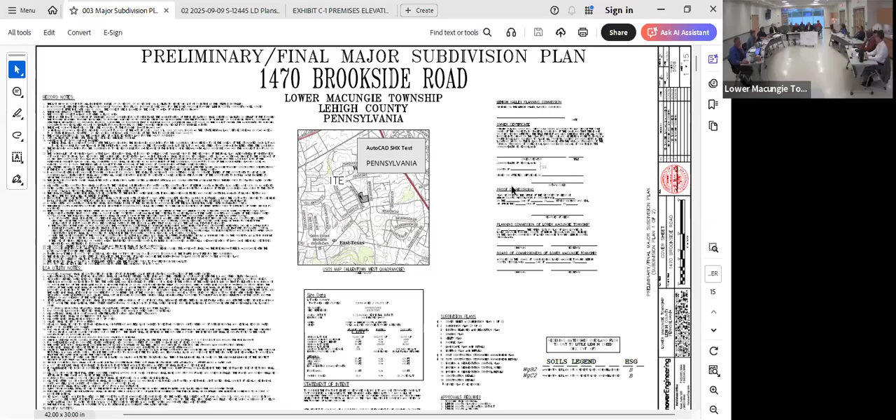Good evening. Sorry, no, all good. So we were turning it over to Brian. I apologize for not bringing you up earlier. No, that's fine. We have the engineer and the applicant and his engineer here tonight.

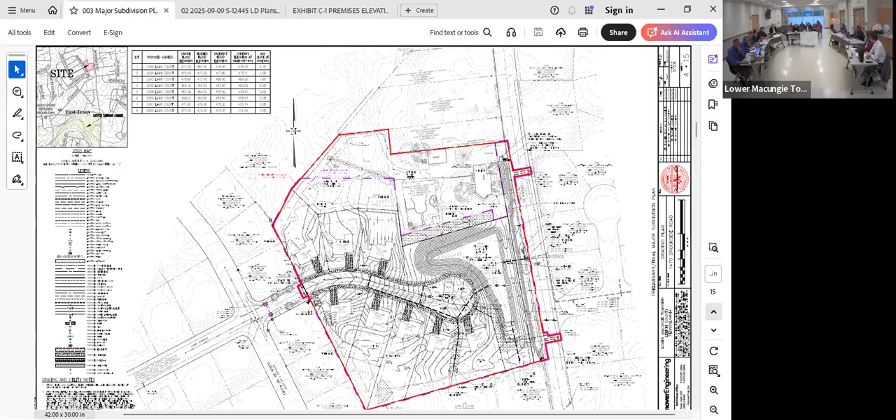We have a review from October 10th. We've done several reviews of the project. At this point, the remaining items are primarily cleanup items. We really don't have any issue with the planning aspects beyond what Nate has already mentioned. I have spoken with the engineer and the items that remain in our letter are basically all will comply. There are some waivers being requested. For the most part, they are what I keep calling the usual suspects, nothing really outrageous.

Based on discussions amongst staff, one of the waivers that will need to be added to the list is something we've been working on with all the applicants of late, and that is the location of street trees. The current ordinance requires them to be in the grass strip between the curb and sidewalk. As most townships have found, over time trees grow, root systems grow, and if the tree matures the way everybody wants, you wind up with roots busting up curb and sidewalk. We've been recommending and requesting that street trees be pushed to the other side of the sidewalk, and everybody has complied. Problem is, it's still an ordinance requirement to be between curb and sidewalk, so we would request that the applicant and their engineer put in an updated waiver request letter to include this. Other than that, it's just honestly a formality.

The other items are requests for preliminary final, the request to show all features within 200 feet of the property. As is always the case, we have a statement that says we can support that, as long as if anything else is needed, we will get it. Most people comply with that, so it's generally not an issue.

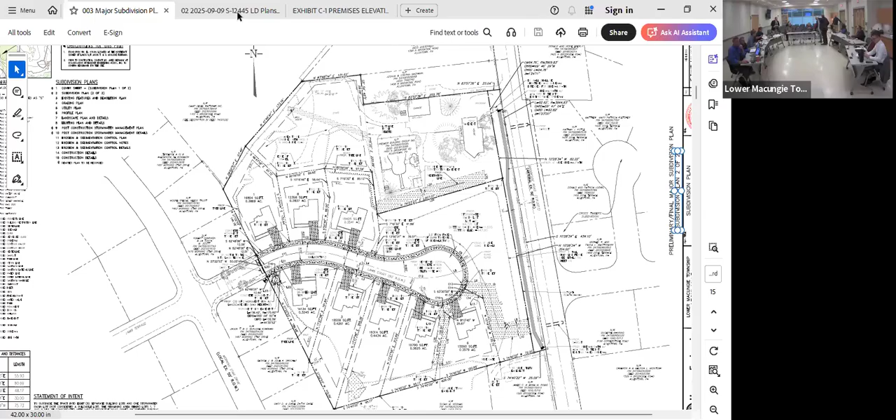All right, so the second item on the agenda is the 2550 Route 100 Sprouts Market and Commercial Development. The applicant would like to come up, if you want to give an overview of this project. Happy to, thank you.

Planning commissioners, members of the public, as I'm sure everyone's aware, this is another project that has appeared before the Planning Commission previously, both as a land development submission and a sketch plan, and has garnered public interest. What you see here is one of the last residual lots of the Spring Creek properties owned by Jaindl Land Company on Route 100. The lot is at the terminus of the new Sauerkraut Lane extension, currently under construction, and would be home to the region's first Sprouts grocery.

In addition to Sprouts serving as an anchor for the site, there is the pre-existing St. Luke's MOB at the south end of the site. In the middle, the new land development submission contemplates a bank and a retail/commercial structure. The overall site is designed with roads and paths to be interconnected and basically act as one.

We have been working in a similar fashion with the applicants from the last project, speaking with the design team to go over review letters discussing items such as architecture, landscape architecture, site layout, stormwater, traffic, and the like. There were a number of public comments given regarding this project at the last Planning Commission meeting when it appeared, and we've taken those into account and had discussions with the applicants internally to make sure public concerns are addressed.

I'd like to note, from a planning perspective, because we know this was a big point with many of our planning commissioners, we have worked with the applicants to increase pedestrian connectivity to two points on the lot coming in off of Route 100 and throughout the entirety of the site.

We've also been able to work with the applicant to ensure that the streetscaping along the St. Luke's portion of the site extends all the way up and around. So this site is going to have streetscaping throughout its whole route, in addition to street trees sensitive to the overhead power lines, on-site planting, as well as shielding for deliveries and garbage.

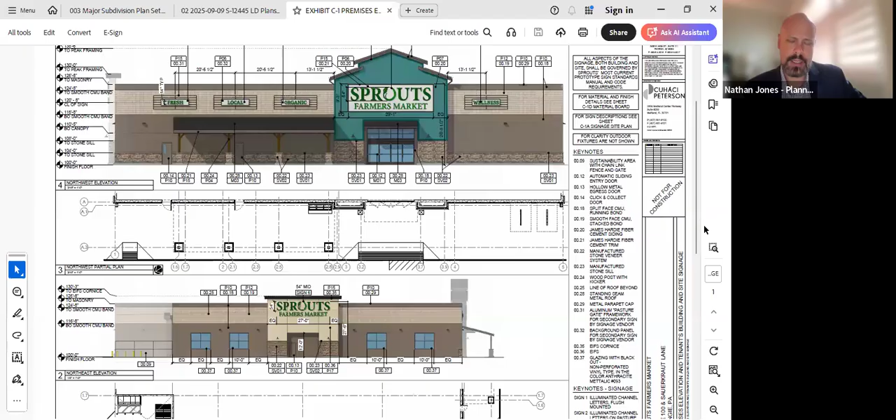On the north end of the site, we also worked with the applicant and their landscape architects to address the stormwater treatment on the opposite side near the existing residences on Quarry, as well as visible from Route 100. We are now working with a potential site design that, from a landscape architecture standpoint and plantings, meets our Brandywine Swale / Firehouse project that we as a township did, which we point to as what we really look for in terms of naturalization and aesthetics for our stormwater structures moving forward.

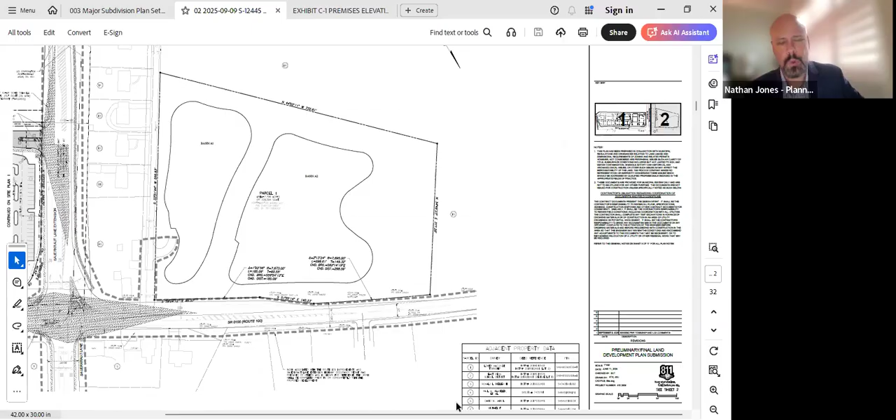There's a number of flowering trees and specimen trees located there, along with seed mixes that include plenty of meadow plantings that'll provide interest from spring all the way to fall. We're very happy that we were able to work with the design team to get such a great product that'll be visible from such a busy street—another large landscape stormwater treatment facility that meets our township's goals.

We've also spoken with the applicants about the fact that this is a very important pedestrian and biking area for the township as we continue to try and weave together our greenway and trail network. To the north is Creamery Park, to the west is Quarry Park. We also have our future greenway that runs along the creek, not too far up the road, and of course all of our residential neighborhoods that immediately abut this area off of Sauerkraut Lane. We're very excited that this area can basically act as a nexus for all these trails, hopefully moving forward.

We have noted and spoken with the applicants about the possibility of putting in frontage improvements that consist of paved trails, since this is land development activity, both on Quarry and on Route 100. I believe they want to speak with the Planning Commission about that a little further moving into their presentation. Given the location here and the Sauerkraut Lane intersection, which will also include pedestrian improvements, we are very excited that this area can work to connect so many of the trails and parks that we have in this area of the township, and eventually our greenway along the creek.

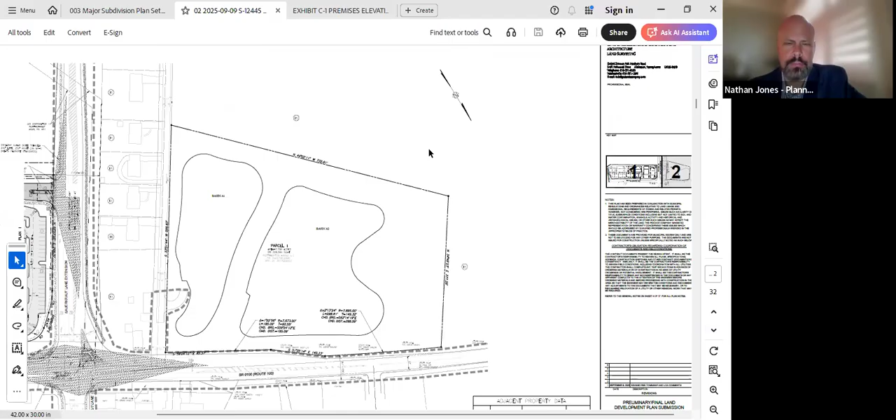So this is all township property here, right? As of a couple months ago. Is there a walkway on the other side of the line? Here, no.

So the idea, Ryan, one of the ideas that prompted this additional request is obviously Quarry Park. Township Park is literally right down Sauerkraut Lane Extension. So there's a need, it's just a matter of trying to build this in as projects are proposed.

Yeah, I mean, I definitely want to see the interconnecting this, but I understand the safety concerns. Does the township have any plans the next 5 years, 10 years to provide that walkway on the Muse properties? I mean, nothing on paper right now, right.

But yeah, so connectivity, like Brian had said, is a goal of the township. Now that the township has acquired that property, we do want to make a connection with Quarry. I'm not 100% sure how and where at this point, but we're looking for other property owners to have that connectivity for us and connect to the lines.

And I would add that the township already has a whole lot of other things in the mix. And I think with the relatively recent acquisition of Muse, that will be factored into future projects. And it's just kind of, with any planning for future parks, et cetera, in my experience it's hard for townships because you could get 10 different people and have 10 different opinions of what should go on that public property.

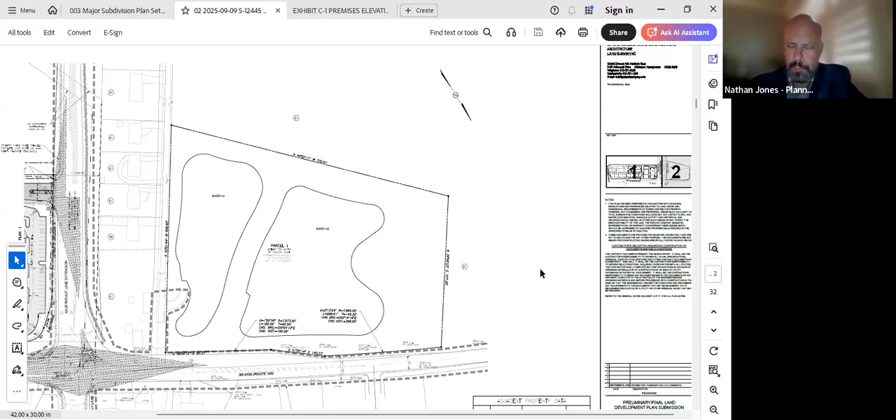I recognize this is different than the normal process. Yeah, I can take that, Mr. Barrett. So essentially, the footprint that you see and the uses as proposed are what would be considered and approved for recommendation by the Planning Commission and eventually by the Board of Commissioners, and then recorded.

If the footprints of those structures change, if the use significantly changes, if the layout of the site and where those buildings are located changes, that would be an amendment to the approved plan, which would require it to be re-recorded, meaning it would come back to the Planning Commission and the Board of Commissioners. If the footprint and layout stays exactly as it is now, with that square footage and building placement unchanged, that wouldn't be the case.

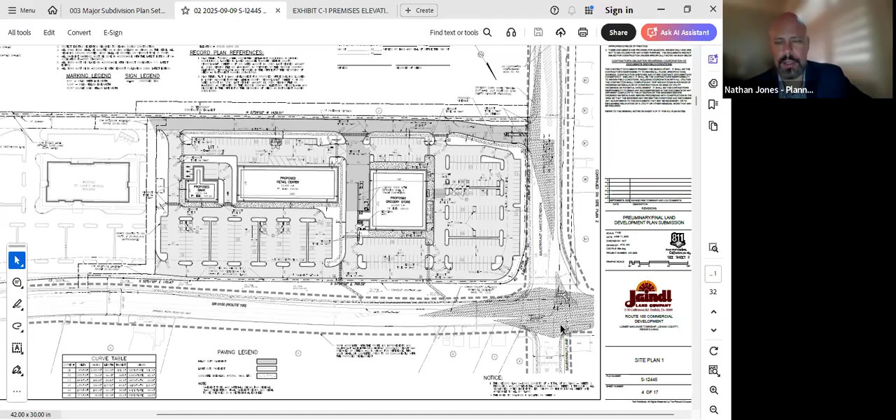But should the market change and they find a tenant with different needs, there's the possibility it could come back in front of this board. Okay, that's fully acknowledged. Any kind of change will come back. I'm not going to try to... no, I recognize that, but again, this is a unique project for a number of reasons.

Okay, so what we're approving is the project we've mainly talked about. We're technically approving two others, but we'll probably hear back from you. If I have my crystal ball out, you'll see us again.

I also want to clarify the assumptions. I think the assumption for the deferral on connectivity is not something that's 10 years, 3 years, or 5 years. The assumption is that it's a timely decision for that connectivity deferral, as long as the township is contingent on building a path. It's contingent on these upstream decisions, but it should be timely.

Well, it really would be up to the Board of Commissioners. They would defer it at a time when they deemed it possible, or when the Board of Commissioners would want that connection. But that timeframe will be built into the deferral. Yes, some timeframe will be built in. I'd rather let Mark give you a better answer, but I would think there has to be something tangible.

What I was describing earlier about the unknowns with planning out township parks and stuff, it wouldn't particularly be tied to that. I agree, it would be tied to when the board determines they want that path. The rest of it is on them. This deferral of the connection along the Route 100 frontage up to former Quarry Road will be written in relative to this project.

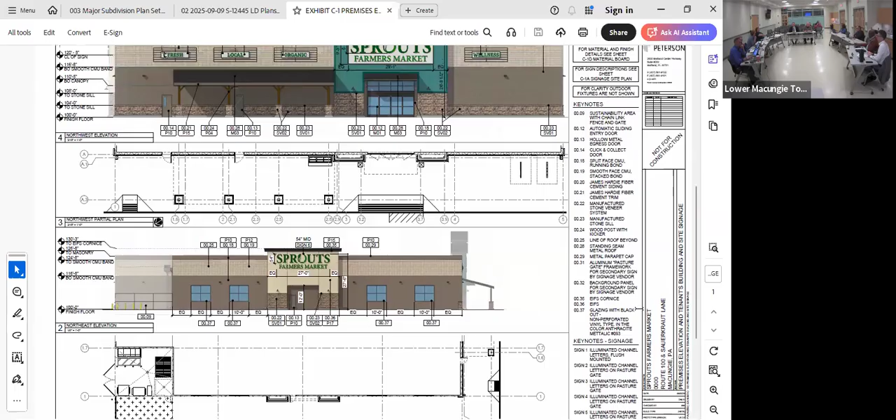Comments from the public? Just say your name for the record. Yeah, Mike Siebel, 1939 Astor Road. I'm the only one in this room who actually has a distinct possibility of walking here, because I live in H Oaks West, so I have several concerns and most of them have been addressed, but I want to make sure they're addressed.

These aren't the developer's issues, they're more my issues if I want to walk there, which I can. First of all, deferring the trails is an excellent idea by the applicant. I'm concerned because I want to walk there, but I'm not gonna cross at Columbine or Foxglove—I'll be dead in a matter of a few days if I keep doing that.

What I want to make sure is that I don't mind going down Sauerkraut and up to the light and hitting it. I think most people, including all the people who live at Spring Ridge—probably 150, 200 people in those condos—are gonna go walking right across the street. I want to make sure there are countdown timers at those crosswalks and bird whistles. That's an absolute mandatory, that's not shown on the plan here, so I don't know that.

But as a resident, I want to make sure I can safely go across that road, with bird whistles and a countdown timer, so I'm not sitting in the middle of the road waiting for an 18-wheeler to hit me. So that's my first concern.

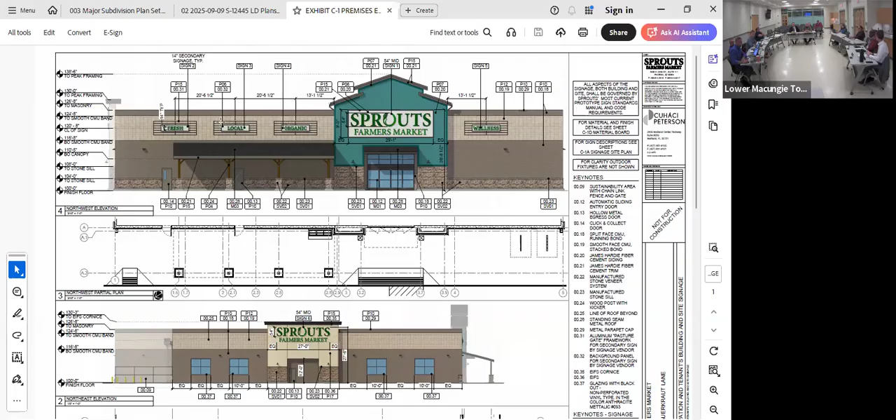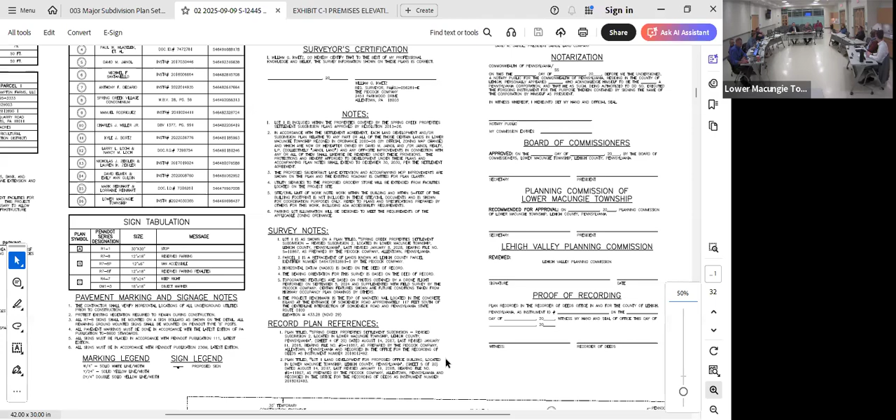Yeah, try it, sorry. There's been talk about deferrals, there's been a deferral for the last 25 years from putting in a left turn lane on Route 100 in the south. That was done when the condominiums were originally built.

So is there a left turn lane, a right turn lane, a through and right, or what kind of configuration is Route 100 going to be? Trying to get that one. Yeah, it's a left, through, right, it does everything. So, Route 100 going north at that point has dedicated left turn lanes, the through lane, and a right turn lane, and the same on the other side.

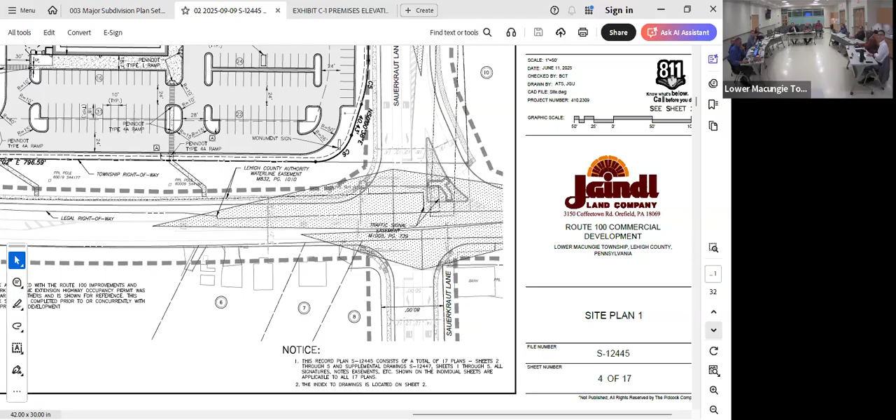So you're talking coming out of Sauerkraut, there would be a left turn from both south and north? If you go to the next sheet, I think you can see the southbound, which I think is...

Do you have any sheets without the triangle? So southbound, right, if you have the right turn lane through to the left, heading to South Road - I mean east. I have the HOP plans up on my screen. At the intersection, I want to make sure I get the orientation correct.

Northbound Route 100 will have a separate left turn lane to go to Sauerkraut Lane Extension heading west. It will have a through lane, and then there's a shoulder, an 8-foot shoulder.

Southbound Route 100 will have a dedicated right turn lane, a through lane, and a dedicated left to turn eastbound onto current Sauerkraut Lane. Similarly, Sauerkraut Lane Extension going west to east will have a through lane and then a dedicated right lane, dedicated left lane. The same exact configuration will be on existing Sauerkraut heading westbound.

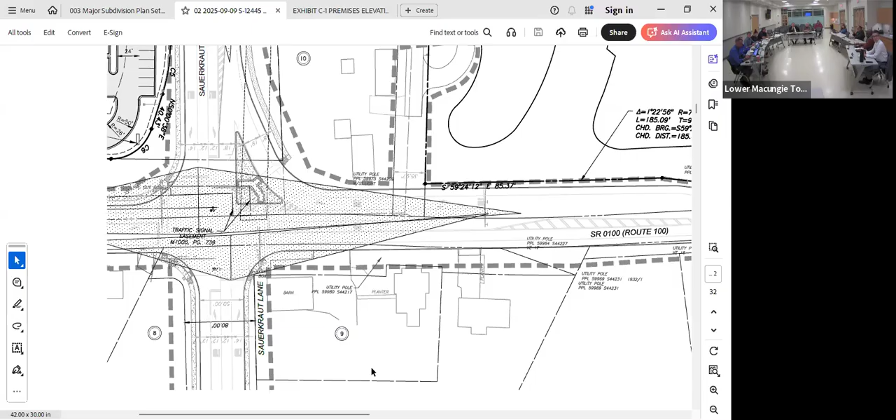So it would be like 6 lanes - Route 100 would be divided into 6 lanes there. The decel lanes are 3 lanes, 2, 3, 4, with shoulders - a right turn decel, going east to wherever it was.

And I - so, Sauerkraut Lane - yeah, existing, closed. Right.

They are, don't worry, in there. The other question is.

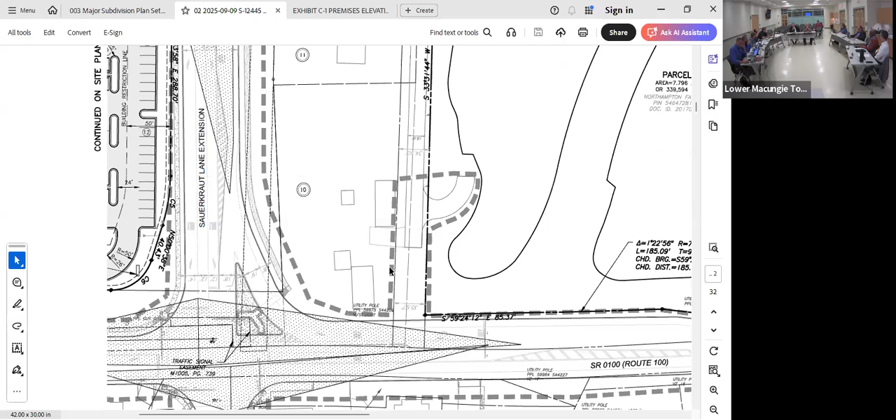With the two contingent on - okay, I never got a clear picture of exactly how the stormwater drainage was gonna work, but there's a pipe that's going from the St. Luke's Medical Building into the existing pond.

And I assume that pipe will be just continued on through an easement - number one, where's the easement? And then also for the additional stormwater that's generated by the main, streets and so forth, how is that being collected and passed through to the ponds in the other area? And what happens if there's overflow beyond 100-year flooding?

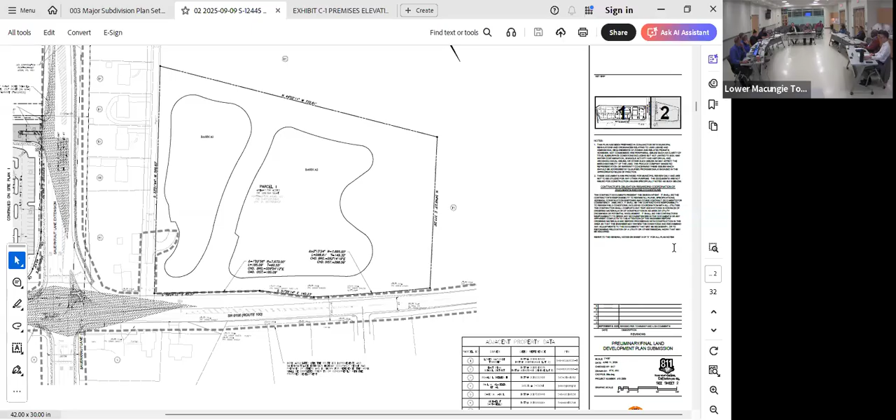Frank, not to interrupt, you know what page that is? We just grading utility plan, probably 4 or 5. Probably sheet 8. Well, you don't know these by heart? Sheet 8, wait a minute - it'd be sheet 8, I can't count - to show the on-site stuff.

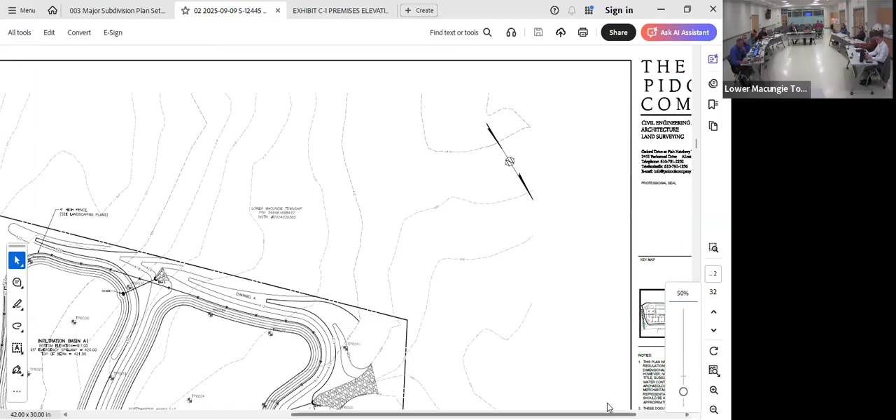So I think, generally, to answer your question, right here, there's storm sewer on site to collect the MOB and all the improved runoff from all the improvements. There's really two trunk lines that leave the property into Sauerkraut Lane Extension and Route 100. Those two lines go around the Miller property in Route 100 and discharge separately to each facility.

Any other questions? How big are those pipes? Or run from? There are 30 - in the PennDOT pipe is big, it's probably 36, 48. Yeah, I was gonna say, you're 36 or 42 or 48. Yeah, and the one on Sauerkraut maybe smaller, 24 maybe.

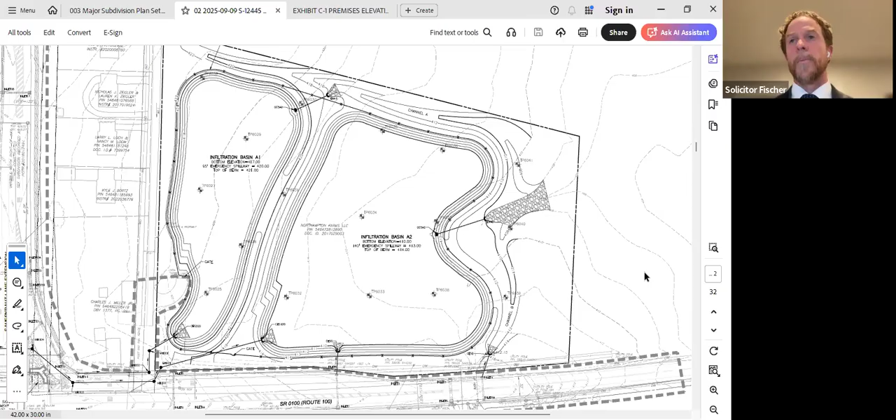If everyone's in agreement, we can just add a sentence that says the applicant can submit a request for a deferral to the Board of Commissioners prior to appearing. I'm fine with that, especially the way we approve these, we're approving them as more of a generic form.

It's everything we've talked about, everything Brian just brought up, and everything Dave just brought up, including, with the exception of the walkway, which was discussed, and we just concluded how we would address that.

Yes, so it's still going to the board. This is just the motion.

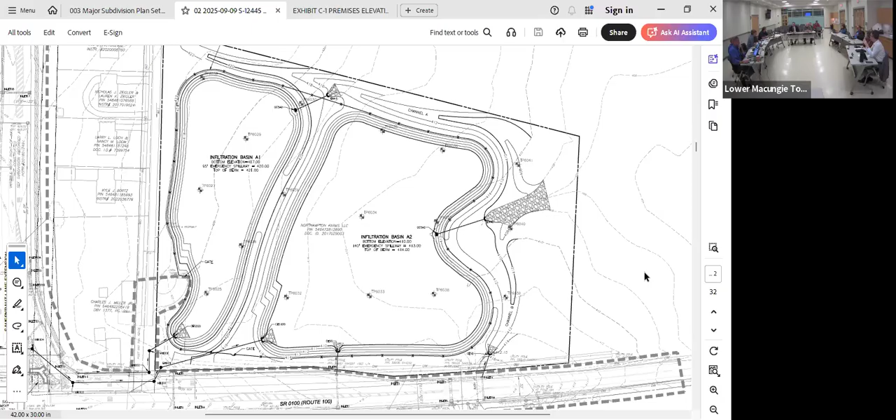Anyone from the public? Hearing none, all those in favor say aye. Aye. Hearing 5 ayes, motion passes. Thank you for your time. Yes, thank you, we appreciate it. Thank you.

All right, that is everything on our agenda. At a lot of our meetings, we've asked for just a brief update on any existing projects that have either gone all the way through the Board of Commissioners or are at the Board of Commissioners. Any updates on that front?

Nate? I can, and by all means, please, Mr. Tranguch, Mr. McAdam, do not hesitate to chime in here. We are working with the applicants continuously on 617 North Krocks, which is the mixed-use project on North Krocks, as they finalize and work towards a solution for the traffic signal over on Cetronia Road in Upper Macungie Township. Once that item is handled, we do expect that it will be back in front of the Board of Commissioners. We are also working with the Red Maple Acres mobile home folks on a timeline for a public hearing.

However, for their plan, we are working towards trying to take care of items that were discussed here at the Planning Commission level, at the staff level, with input from the township engineer, Mr. Russo, Mr. Tranguch, and myself, regarding the design of that area. So that is also currently in process. Those are the ones I can think of right now that are of most discussion and are heading to the board. And then, of course, these now leaving Planning Commission, we would expect to have in front of the Board of Commissioners for their consideration in the upcoming month or so.